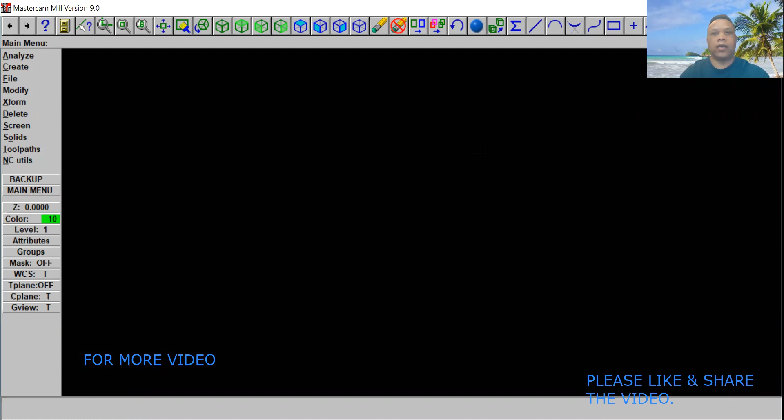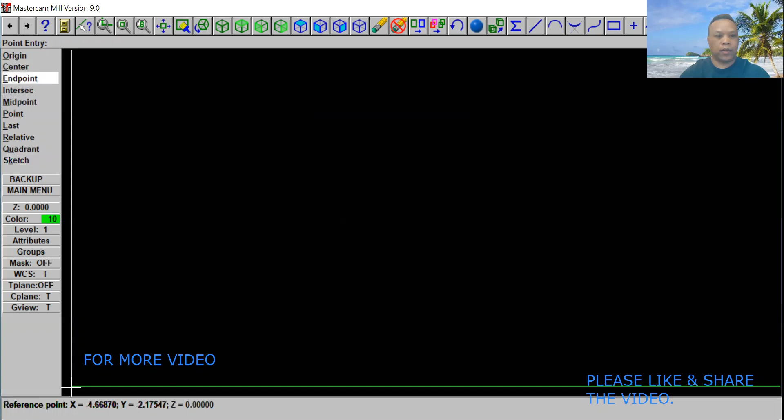Now let's go to Mastercam 9 and open that up, go to main menu and click on Create. Then we're going to click on Rectangle and 1 point. We're going to put 48 by 94, this corner here, click OK. Drag all the way to the bottom left, click it on there, and click Escape. Alt F1, put the screen in the middle.

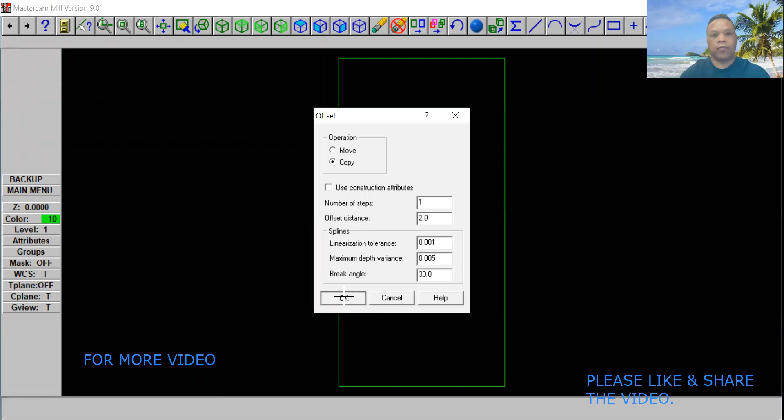Then we're gonna go over here to main menu again. Now this time we're gonna make it a line. Go to X form and offset, and click on copy here. Then click 2 inches, okay, then click OK. Stop this line right here, click it right here. Go back to main menu. Then we're gonna make a box 20 by 20, corner shelf.

So we're gonna click on Create, click on rectangle, go 1 point, put on 20 by 20. Then we're going to click right here on the middle and click OK.

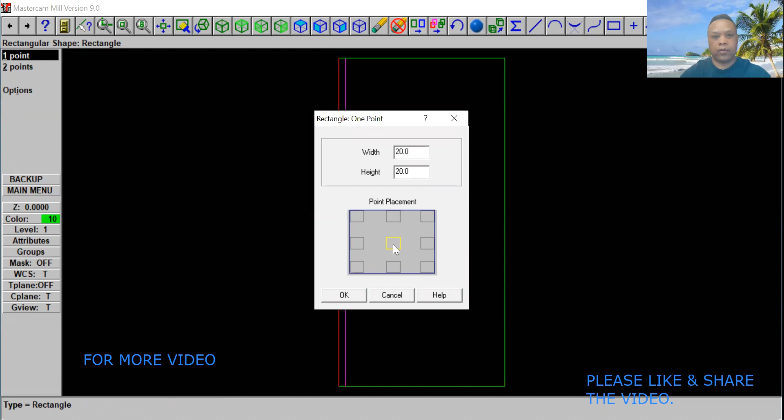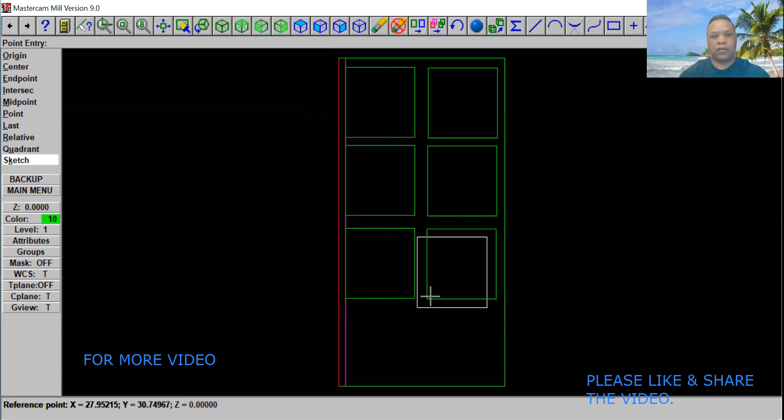Right here, line it up right here. That's 1, 2, 3, 4, 5, 6, 7, and try to get 8 right here. And 8, okay. Click Escape.

Gonna come back on the top right here and delete this first line right here. Okay, we've got 8 boxes right here.

Then we're gonna go back to main menu, click on X Form and Offset. Right here we've got a copy, click on there, and then offset distance we're gonna put 14 inches. Okay, and then okay. Then we're gonna start from this side right here, from the left to the right. 1, 2, 3, 4, 5, 6, 7, and 8. Okay, back to X form again.

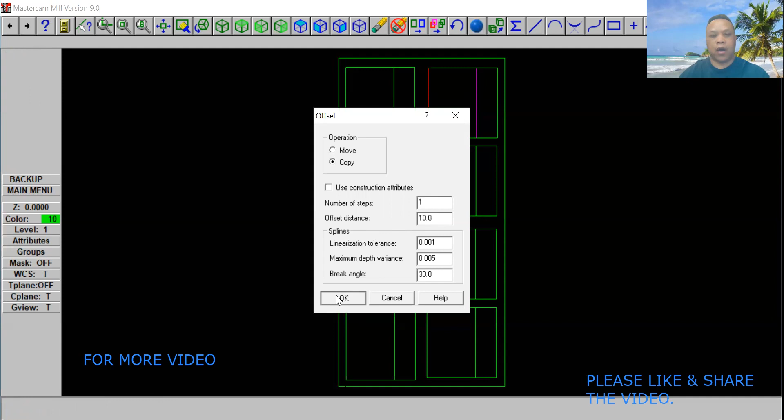Offset X form, and then right here, offset distance again, we're gonna put 10 inches, okay? And 10 inches, we're gonna click from bottom to top. 1, 2, 3, 4, 5, 6, 7, and 8, okay. Now we're gonna go over here, click on Create.

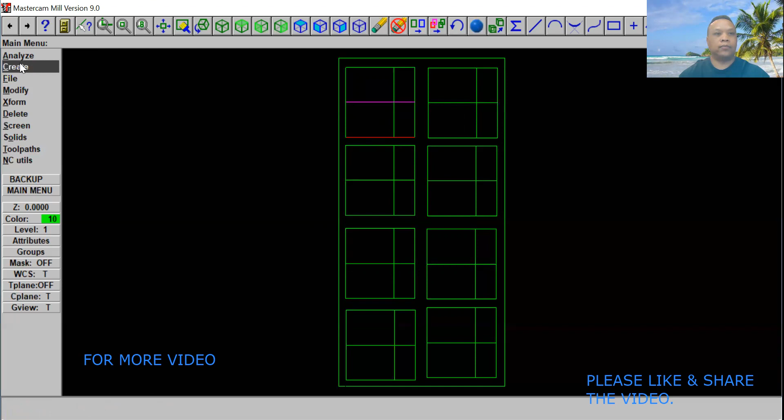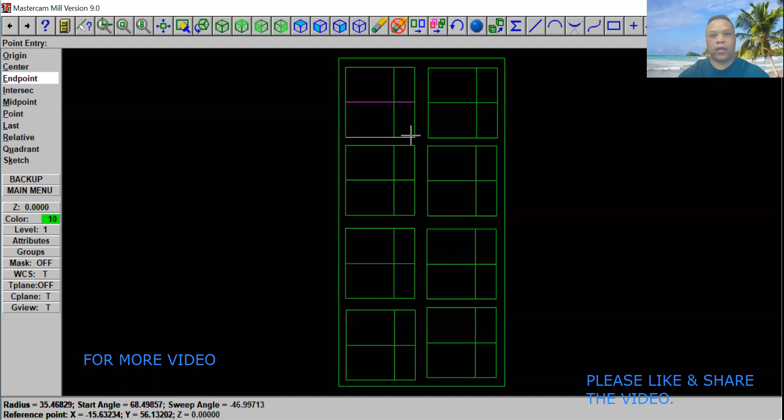Then we're gonna click on Arc, then we're gonna use 3 point, okay. Now 3 point, we're gonna use right here in this corner here, on the top corner right here. Click on it. Then we drag all the way to this middle here and the midpoint right here, and click on it. Then we're gonna drag on this corner right here, end point. Put on this point right here. So we're gonna do all this like this, all the 8 boxes, okay.

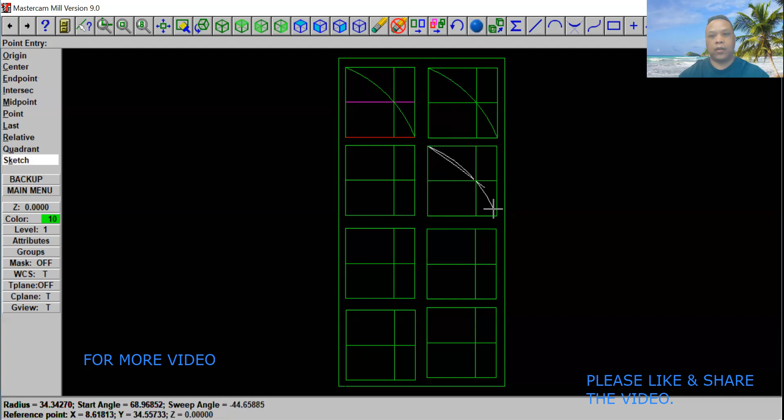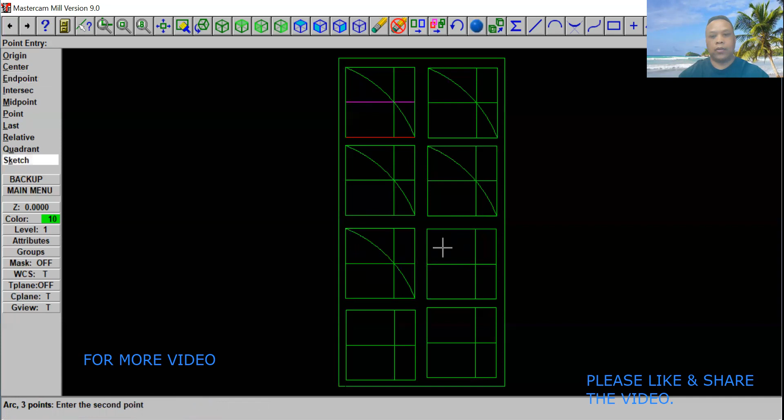Okay, let's start again from the top. 1, 2 in the middle, and 3 in the bottom right here. On the top, at midpoint, and an end point right here. We repeat this for each box: top, midpoint, end point. Okay, so we got our 8 rectangle, and we got 8 shelf.

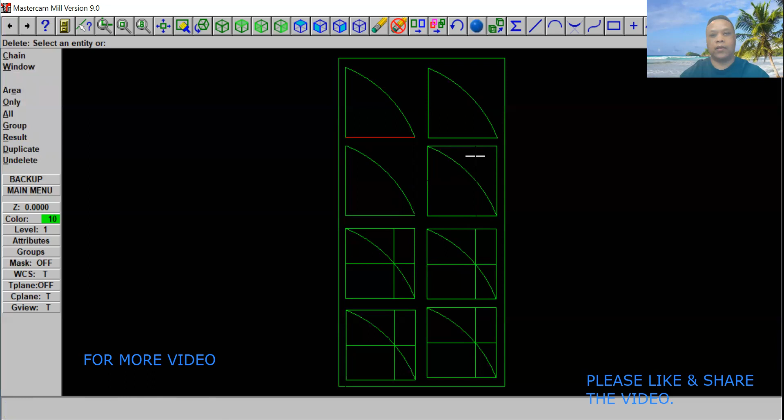Okay, now we're gonna go to delete. We're gonna delete this line right here. 1, 2, 3, 4, 5, 6, 7, 8. Okay, so we got our lines. Get out of the way, and we got 1 through 8 corner shelf.

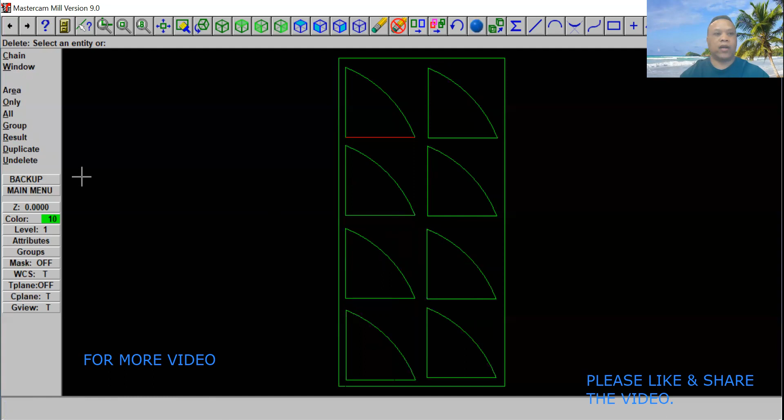Okay. Now before we're cutting, we're gonna go back to main menu. We're gonna go to Xform again, and this time we're gonna use a 1/2 inch. Okay, on Xform offset, put 0.5, 1/2 inch, and then click OK. We're gonna click from left side to right side, 1 here, then bottom to top, 2, and then from here to the inside, 3. Okay, we can do that all the way through 8.

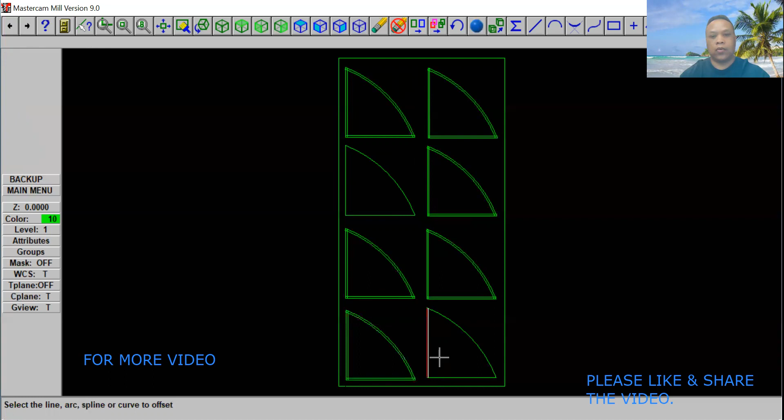Okay, this is gonna be an option here. So we're gonna run a regular shelf with no pocket, and then we're gonna go and make a little pocket. So 2 options — I'm gonna do 4 with a pocket and another 4 with no pocket.

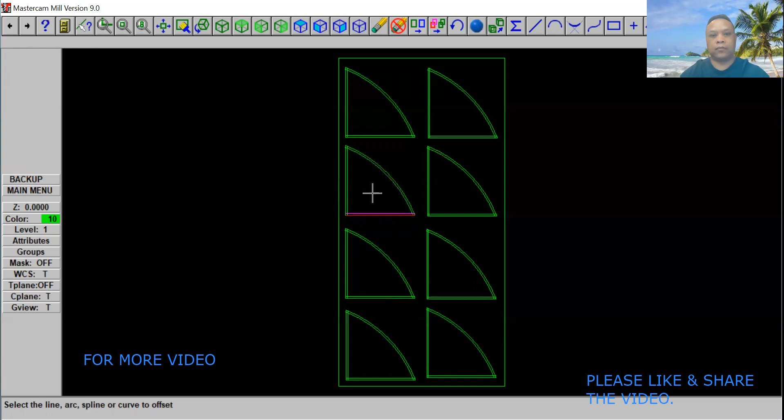Okay, let's do that. Let's go to main menu. We're gonna click on toolpath, click on pocket. Now this time we're gonna do from the bottom. We're gonna click on the inside right here.

But before we do the inside, we're gonna go back to main menu again. And then we're gonna go to modify and trim. And then we got trim right here, and then click on one entity. We got 1 here, 2 here, 1 and 2.

Okay, we trim that out first. 1, 2, 1, and 2 — repeating this process across the top and bottom for each corner shelf.

Corner right here. Top. Bottom right here. Top. Bottom. Bottom right here. Top. Bottom right here. Bottom right. Bottom right again. Top. Bottom left. Bottom right. Top.

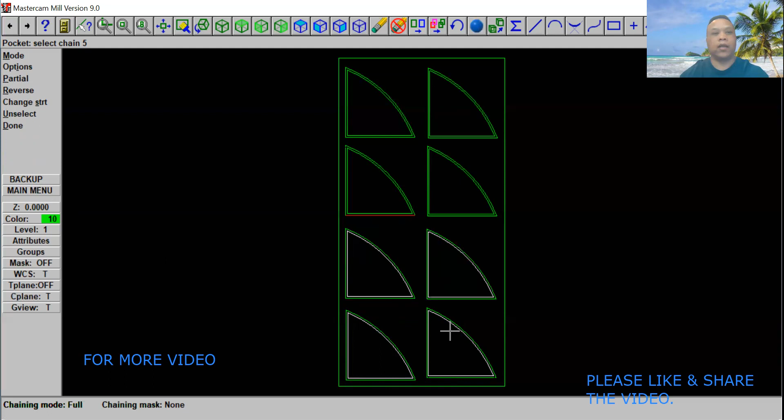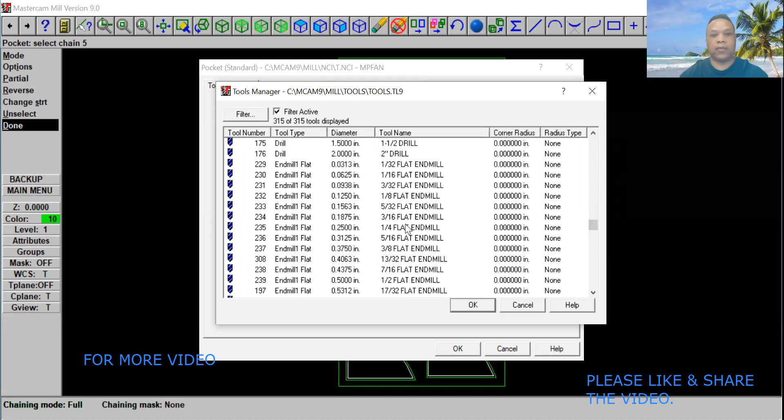Go to our tool library and right click, get the tool from our library. We're gonna scroll down to get a 1/4 inch tool, which is 235. It's right here, a 1/4 inch flat end mill. We're gonna use that for the pocket. Click OK. Then right here, feed rate, plunge rate, retract rate, I'm gonna change that to 7.0 — I want it a little bit faster. Retract also 7.0. And on this spindle speed right here, we're gonna slow it down a little bit to 2000.

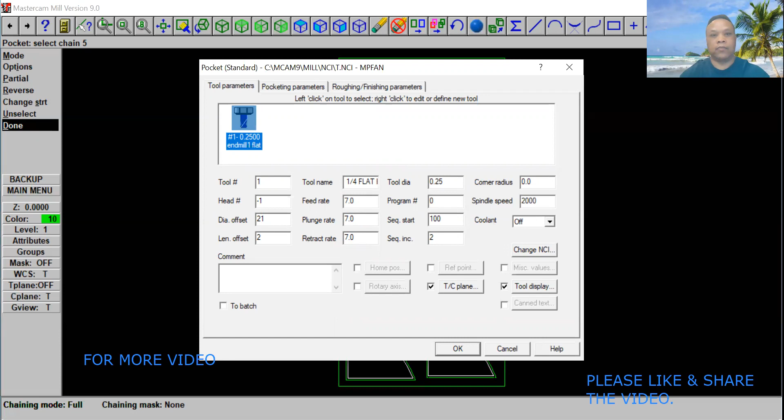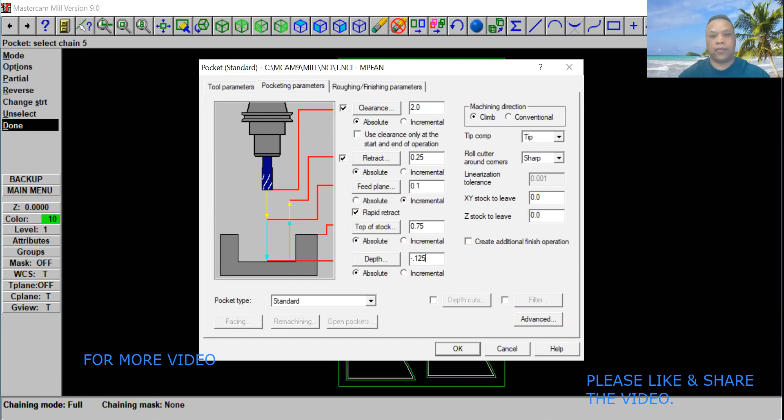Okay, and then we're gonna go to roughing and finish parameters. This time we have options like zigzag, constant overlap spiral, parallel spiral, clean corner. I'm gonna use zigzag. Click on zigzag and then click OK. That's how it looks right here, guys.

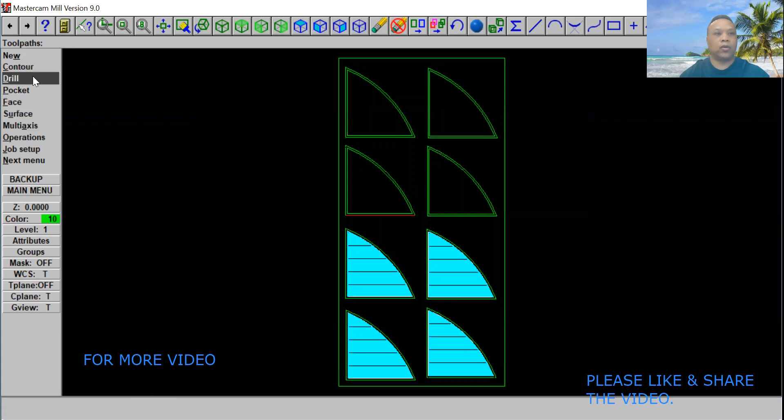Now we're gonna go back to our contour, and we're gonna cut all these 8 out. We're gonna use tool number 239, which is a flat end mill. Now right here in this corner, we're gonna go ahead and click it. We're gonna come back to this side also — 2, 3, and 4.

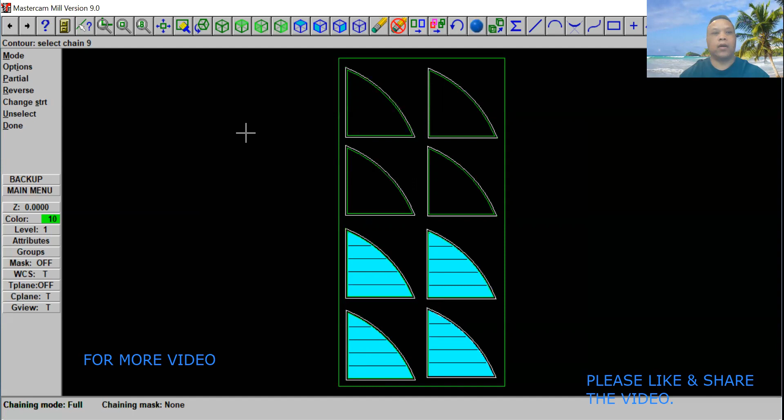Okay, all done. We're gonna right click again, get tool from our library, then go to tool number 239, the flat end mill, click OK. This time we're gonna change the feed rate, plunge rate, retract rate since we changed this cut. Gonna go to 9 — a little bit faster on this cut. And this one right here, spindle speed, we're gonna change it to 2000, make it a little bit quicker.

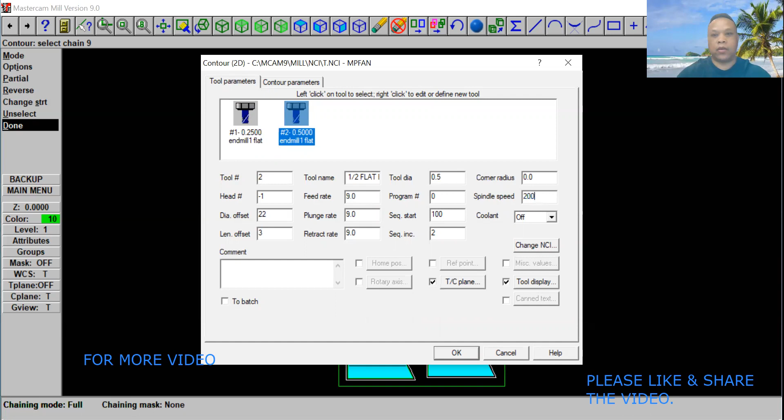And then we're gonna go to contour parameters, which we already checked the clearance and top of stock already. So this depth, we're gonna go to negative 0.75 because we're cutting all the way through. So we're gonna put negative 0.75. Click OK — it's all highlighted, it all looks good.

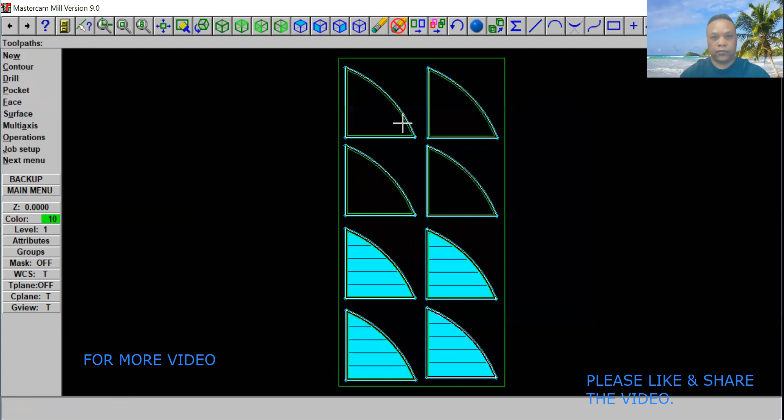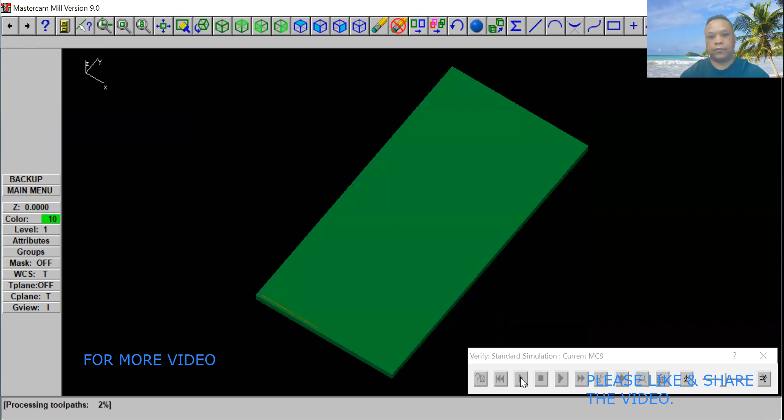Let's go to main menu, then toolpath, then click on operation. Now we're gonna select all, regenerate path, and verify. Now we're gonna execute this one — go right here to the start button. So you want to move a little bit faster on here, you can. See how it goes. What do you guys think about this?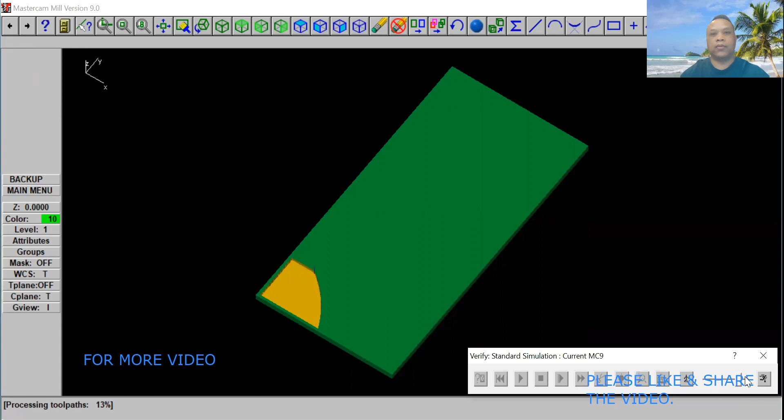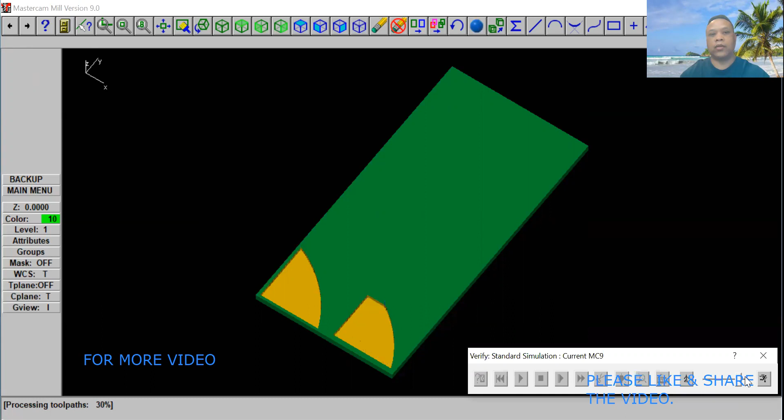This is for the corner shelf, guys. You can use this for your entertainment area — you can stack it up and build a shelf, put a DVD or a picture, anything like that. Or a lot of people use it for a garage cabinet, laying tools or pictures inside your garage. Whatever they're using is good — I think it looks great in your garage too. That's why I'm making two options: one with a little pocket, one with no pocket.

So depending on what the customer wants, there's an easy way you guys can adjust the stuff from there. So that's how it looks, guys. We got a pocket right here — 1, 2, 3, 4 right here with a pocket, 1/8 inch deep. At least when you put something on here, it will not slip away because it's got this pocket. And this one right here is just a regular shelf that you can put it on. It looks really nice.